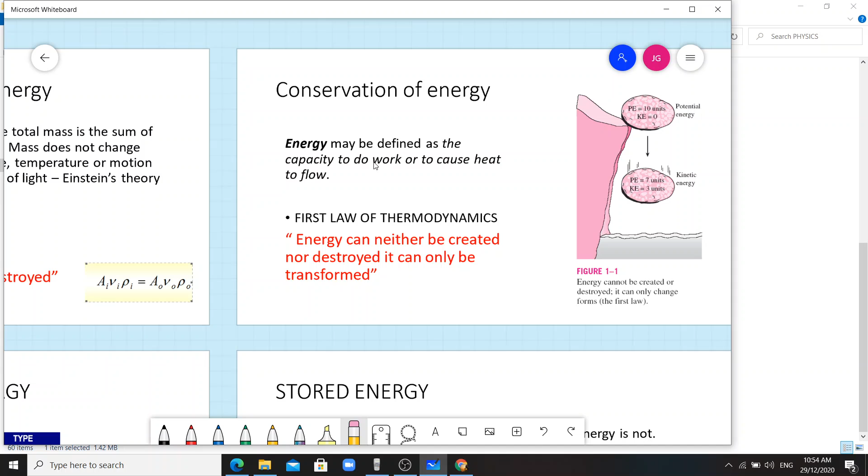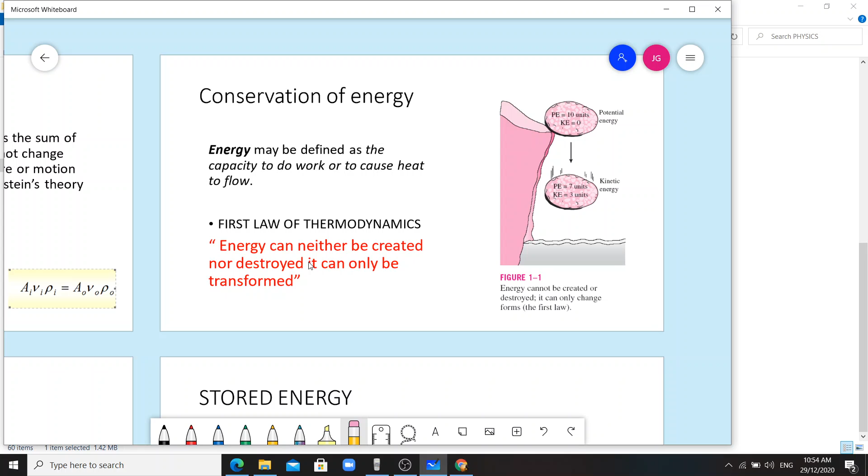Conservation of energy: energy may be defined as the capacity to do work or to cause heat to flow, as we discussed in the earlier video. First law of thermodynamics: energy can neither be created nor destroyed, it can only be transformed. There are different types and forms of energy.

Mechanical energy is a classification of energy. Its forms are potential, kinetic, and work. Potential and kinetic are stored energy, while work is a flow or transition type. Heat is a classification too, with forms sensible heat and latent heat, both flow or transition types. Chemical energy is molecular bond energy, stored. Internal energy is molecular motion, also stored. Electrical current is flow or transition. Nuclear energy is atomic bond energy, stored.

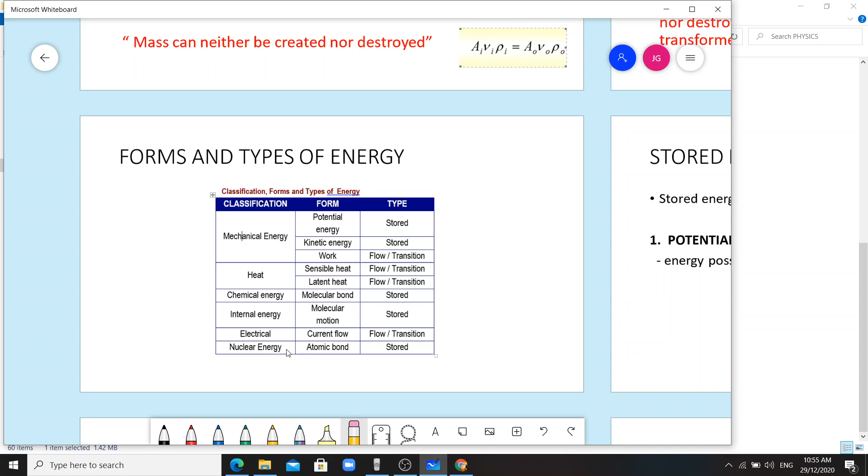When we say stored energy, it is a property, whereas transferred energy is not a property.

Potential energy is, so to speak, energy that's just there in the object—potential to do work. It's energy possessed by a mass due to the pull of gravity. Our formula before is potential energy equals mgh.

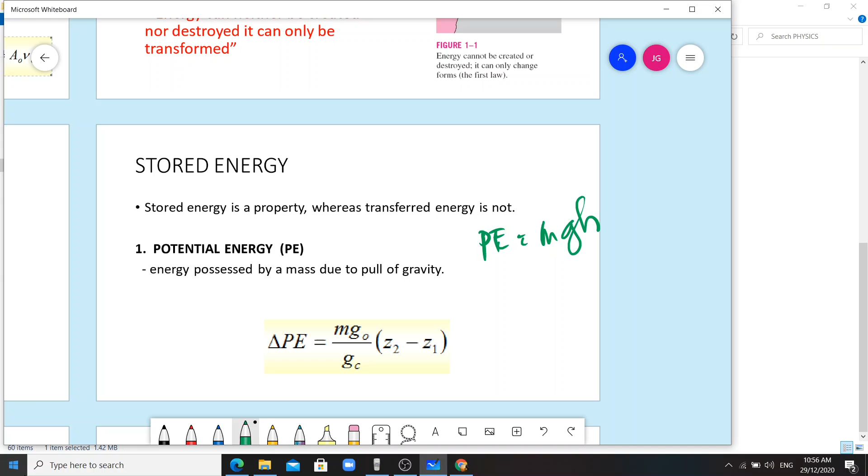Kinetic energy is due to motion or velocity. If potential energy is defined by height or vertical distance, kinetic energy is defined by velocity or motion. So this is 1/2 mv squared.

Internal energy: the sum of the internal kinetic energy and internal potential energy is called the internal energy—energy stored within a body or substance by virtue of the activity and configuration of its molecules. So per molecule and atom, there's vibration. For internal kinetic energy, we have translational kinetic, vibrational, and rotational energy. If these are the molecules, translational kinetic energy is when they move, say, left or right. Vibrational energy is when they move back and forth, vibrating. Rotational energy is when the molecules spin.

Internal potential energy is based on the distance between the two molecules—the height between them. For rotational kinetic energy, there are two types: rotation of the molecule itself, and rotation about the axis of the molecules. So internal energy is defined as U = mcv delta T. This is per molecule, the energy of its molecules.

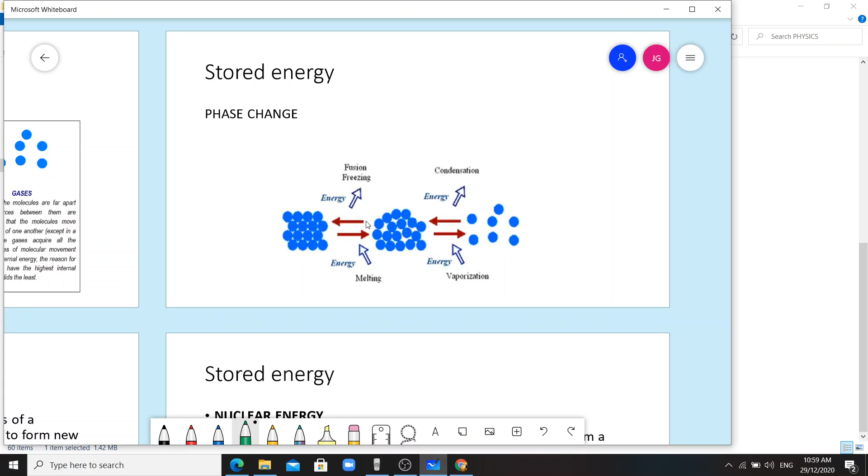Chemical energy is also a type of stored energy. A chemical reaction occurs when the molecules of a substance dissociate or combine with other molecules to form new substances—this is like our chemical equations and formulas in chemistry. There are two types of chemical energy: in exothermic reactions, energy is released; in endothermic reactions, energy is absorbed. For endothermic, energy goes in—like electrolysis. For exothermic, energy is released—like combustion.

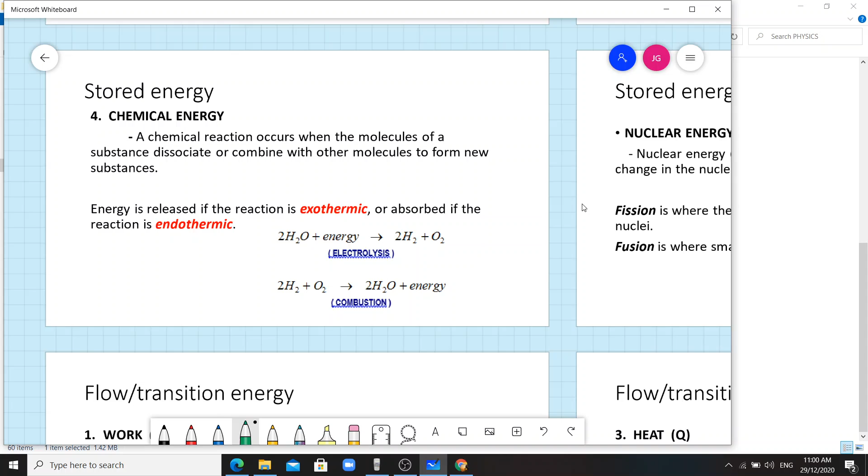Another type of stored energy is nuclear energy, sometimes called atomic energy, which results from a change in the nucleus of an atom caused by a nuclear reaction. There are two types of nuclear energy: fission and fusion. In fission, the nucleus breaks down into a number of smaller nuclei. In fusion, small nuclei combine to form a large nucleus. So fission breaks down, while fusion combines.

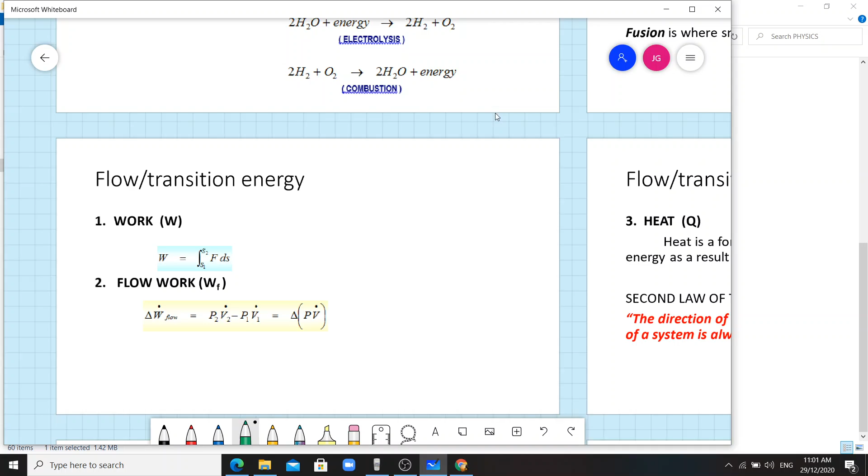So, tapos na tayo sa stored, punta tayo sa flow or transition energy. Ang stored energy ay property, ang transition energy is not. Nagfo-flow siya. Work is a transition energy.

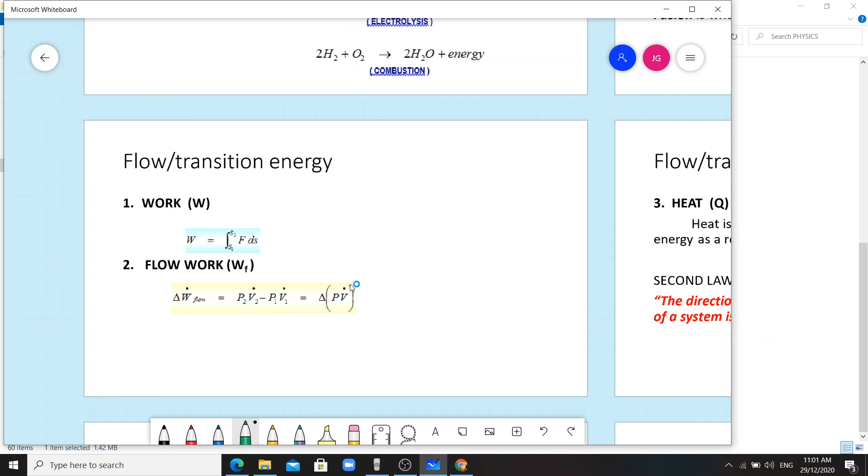Work is equals to force times distance, diba? Flow work naman can be equated as P2, pressure 2 times volumetric flow rate minus P1 V1. Paki-memorize lang yung formula.

Heat then is a form of energy that occurs only as a flow or transfer of energy as a result of temperature difference. Sabi sa second law of thermodynamics, the direction of heat flow in a substance or across a single boundary of a system is always from the higher to the lower.

So, from mainit to malamig. Ganon ang flow niya. Hindi pwedeng malamig to mainit, mainit to malamig. Kapag halimbawa meron kang kape, in-expose mo sa room temperature, lalamig siya. Hindi pwedeng uminit yung air na nakapalibot sa kanya. Ang mangyayari is, lalamig siya. Magre-release siya ng heat. Hindi pwedeng palamigin ng room temperature yung mainit.

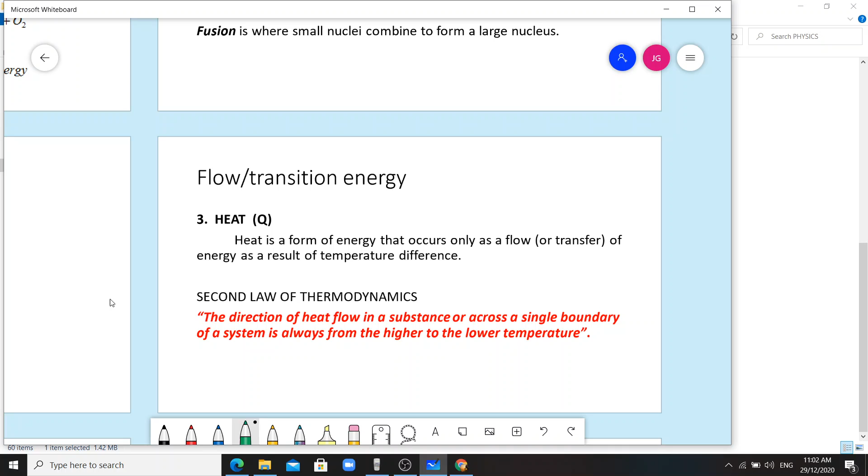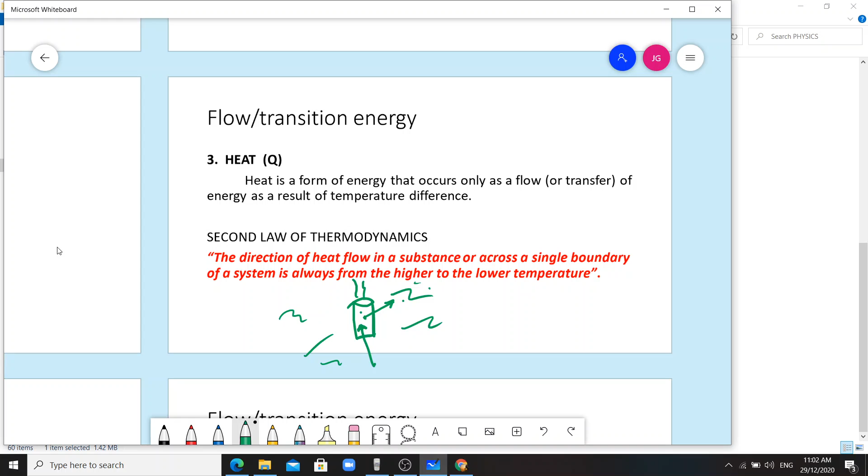Or painitin niya lalo yung kape. Halimbawa meron kang kape dito, mainit, tapos room temperature yan. Parating from mainit, lalabas yung energy, lalabas sa mas mababang temperature. Hindi pwede na from malamig, papainitin niya pa to lalo. No, it's not going to be like that. Baliktad siya.

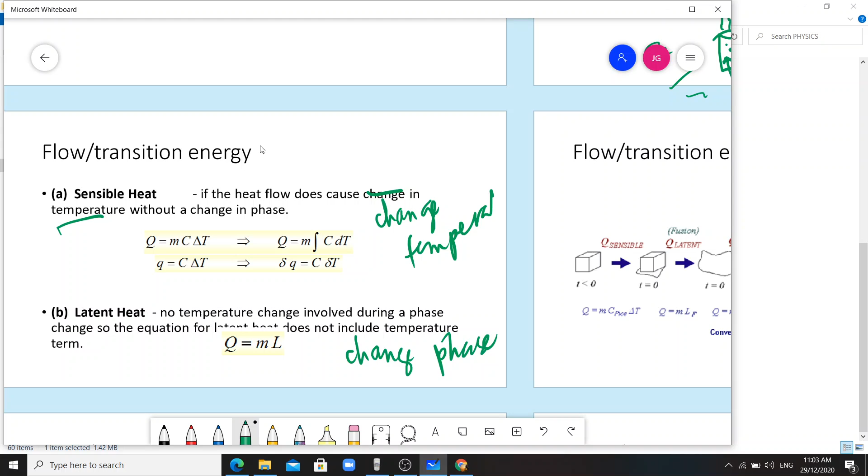Meron tayong two types of heat, diba? Sensible heat, pag sinabi natin sensible heat, merong change in temperature. Pag latent heat, walang change ng temperature, pero meron ng change phase. Sensible heat, merong change in temp, pero walang change phase. Dito naman sa latent, may change phase pero walang change of temp.

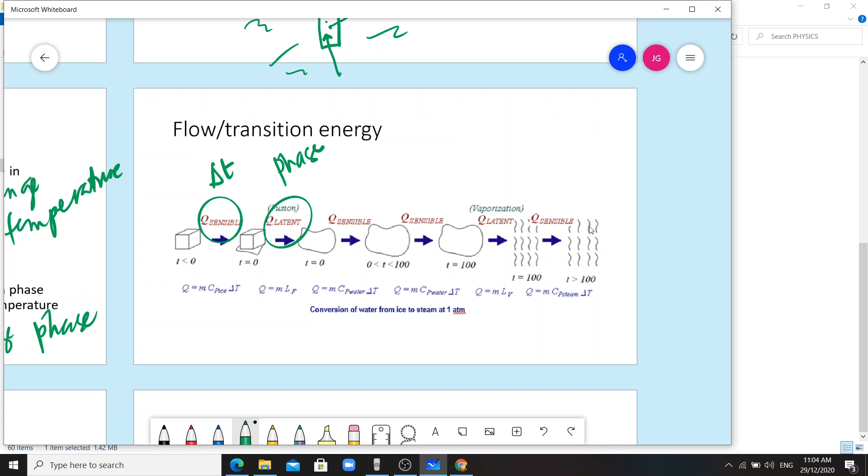Sensible, nag-change lang ng temperature pero hindi nag-change phase. Latent heat, parehas ng temperature pero nag-vaporize, so naging gas. And then sensible ulit. Basta tandaan, kapag sensible, change ng temperature. Pag latent, phase ang nag-change, from liquid to gas, gas to liquid, solid to liquid, ganyan.

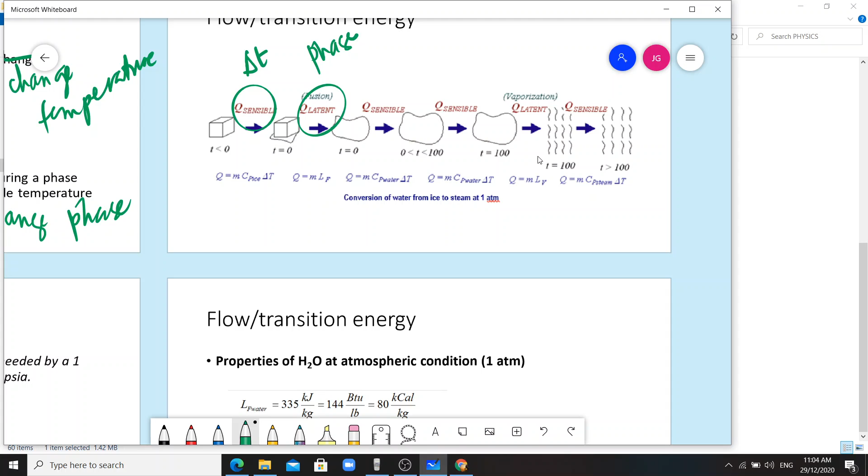So ito rin yung formula niya. May change temperature kapag Q naman latent, so M times latent heat of fusion. Pag vaporization naman is latent heat of vaporization.

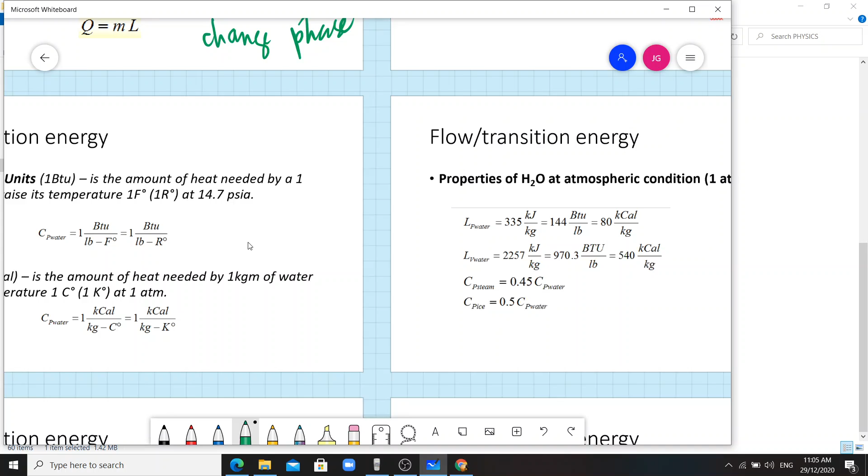Meron tayong British thermal unit. 1 BTU is equivalent to the amount of heat needed by a 1 pound mass of water to raise its temperature at 14.7 psia. Kilocalorie naman is the amount of heat needed by 1 kilogram of water to raise its temperature by 1 degree Celsius. Meron tayong constant na LF or latent heat of fusion.

335 kJ per kilogram, 144 BTU per pound, 80 kilocalories per kilogram. Pag vaporization naman, ito yung nag-vaporize: 2257 kJ per kilogram, ito ay water ha, 970.3 BTU per pound, 540 kilocal per kilogram.

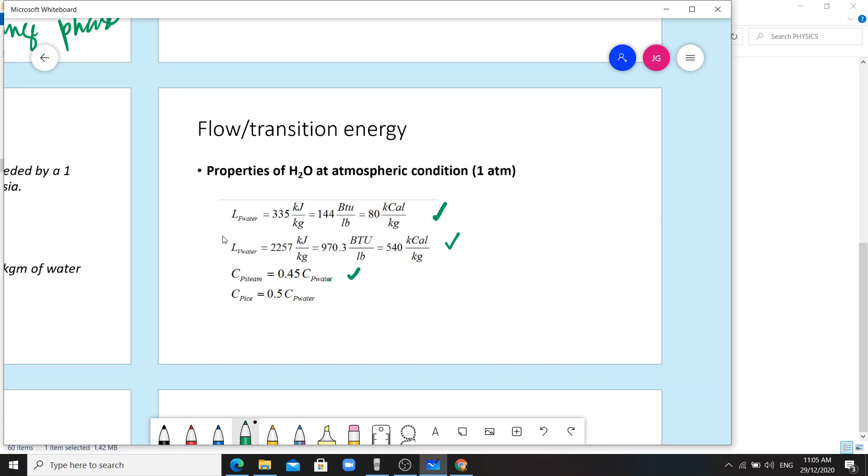CP ng steam, 0.45 ng CP ng water. CP ng ice is 0.5 CP ng water. Ang CP ng water ay 1 BTU per pound R.

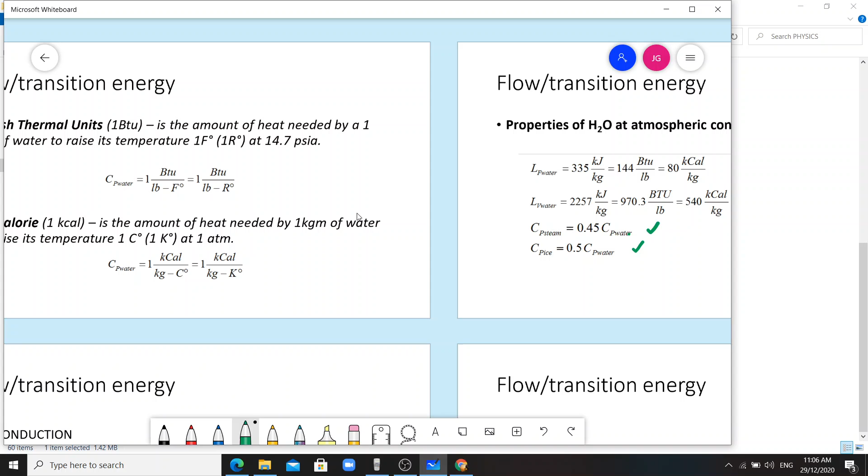Okay, let's proceed. Flow transition energy, meron tayong sa heat ulit: conduction, convection, at radiation. Pag sinabi natin conduction, ito yung merong contact. May contact, halimbawa, meron ka ditong two bodies, A to B. Nag-flow yung init, so conduction yan.

Kapag convection naman, ito yung object mo and then nakapalibot siya ng fluid. So, from solid to fluid, convection yan. Kapag radiation naman is from the solar energy, radiation ng araw.

Ang Q is equals to negative KA dt over dx. Convection is Q is equals to HA and then temperature of solid surface minus temperature of fluid. Pag radiation naman, surface emissivity times the Stefan-Boltzmann, times the area and then the temperature 1 and temperature 2.

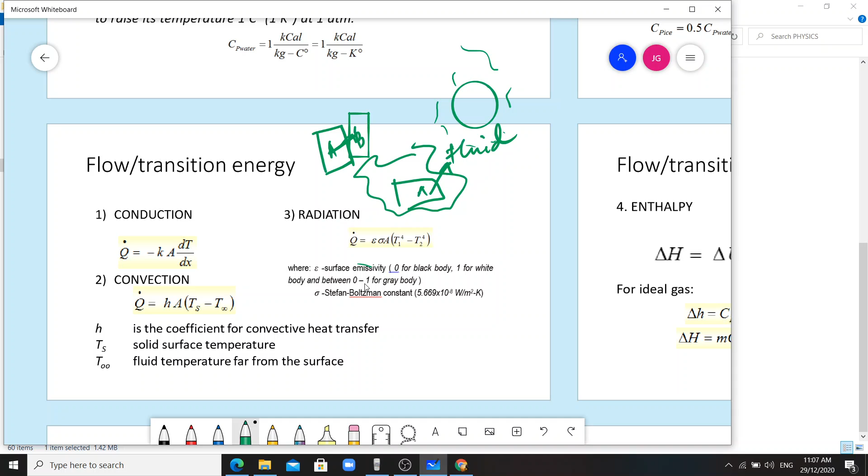Paki-memorize lang po yung formula kasi you need it. Flow transition energy, meron tayong tinatawag na enthalpy. Delta H equals to internal energy plus the work. Pag gas naman is MCP delta T.

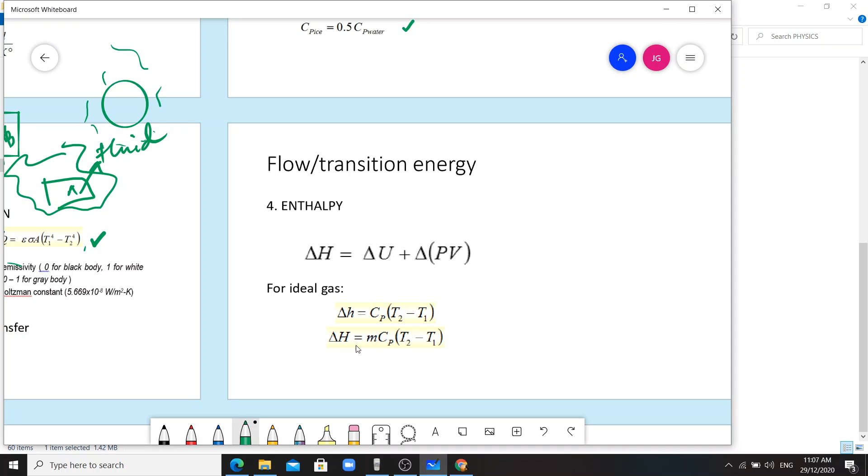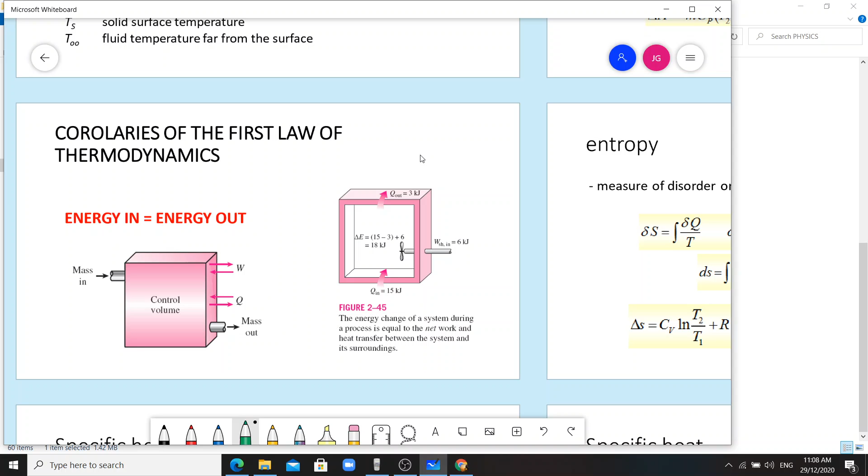Sabi sa corollaries of the first law of thermodynamics, energy in is equals to energy out. Mass in is equals to mass out. Kung ano yung pumasok, yun din po yung lalabas. Entropy, measure of disorder or chaos. Ito yung movement, yung galaw ng molecules.

Ito yung entropy. Ang formula niya is CV ln T2 over T1 plus R ln V2 over V1, or CP ln T2 over T1 minus R ln P2 over P1.

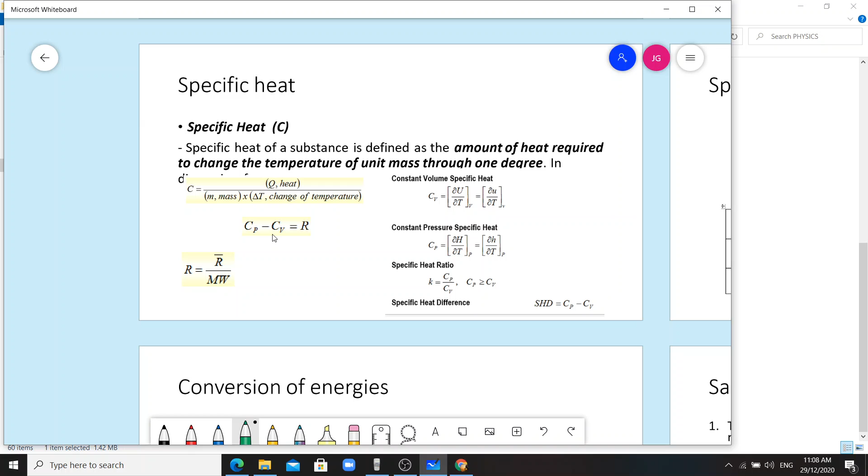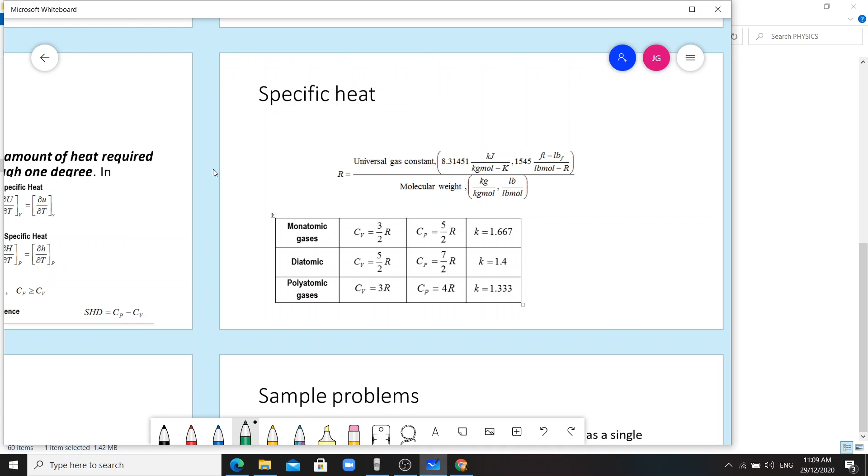Paki-memorize lang din yung formula. Specific heat, ayan ang specific heat. Equivalent sa, meron tayong Cp minus Cv is equals to R. Ang R is gas constant, okay. So, universal constant, specific heat. Paki-memorize lang din po. And then, conversion of energies. Paki-memorize yung conversion table.

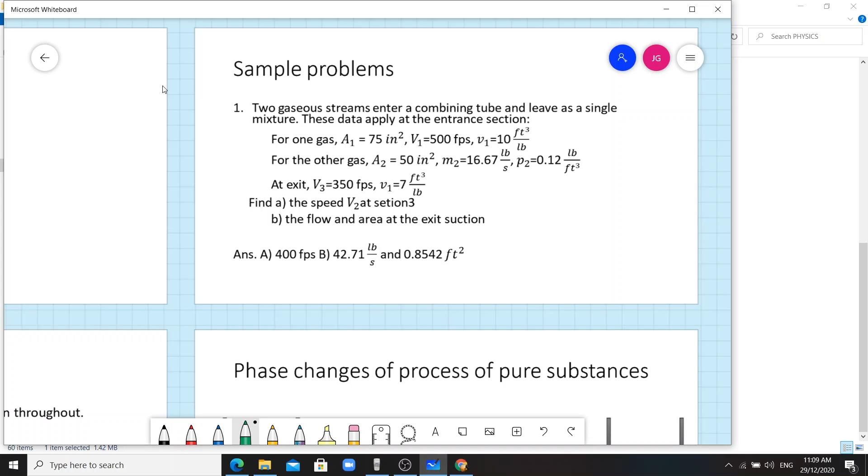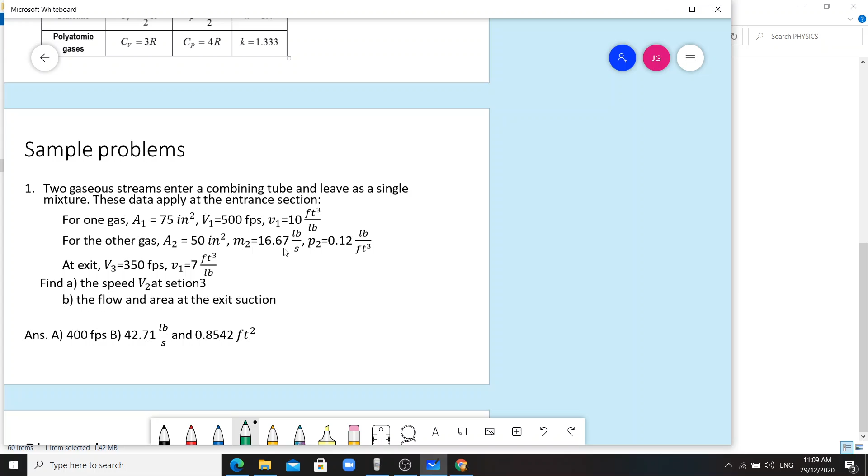Okay, sample problem. Two gaseous streams enter a combining tube and leave as a single mixture. This data apply at the entrance section. Okay, sa entrance, ito daw yung state niya. Ang area niya is 75 inches squared. Velocity niya is 500 feet per second. Ang specific volume is 10 feet cube per pound. Ang paglabas is 50 inches squared, 16.67 pound per second, and then density na 0.12. At exit, sabi niya combining tube, so ang itsura niya is ganyan. Area 1, area 2, and then area 3.

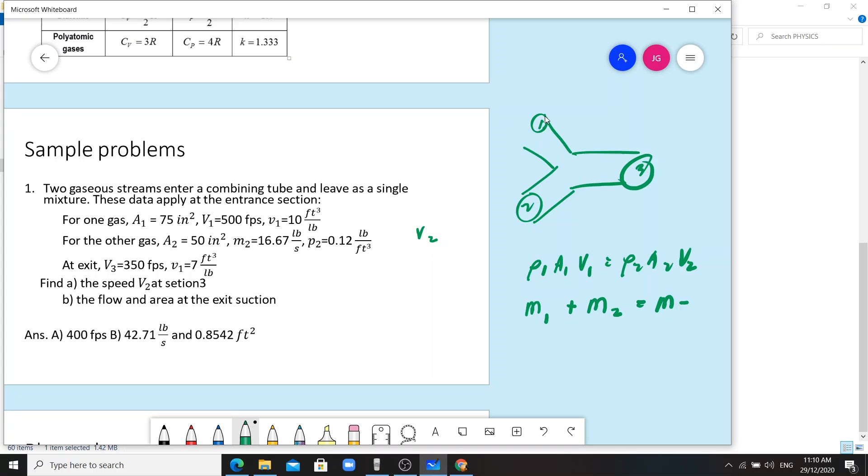Sabi, find the speed V2 at section 2. Ito, section 2, find the speed. Okay, ano daw yung V2? Di ba meron tayong formula na rho 1 A1 V1 is equals to rho 2 A2 V2, di ba? So meron din tayong mass 1 plus mass 2 is equals to mass 3. Okay, so hinahanap is speed at V2.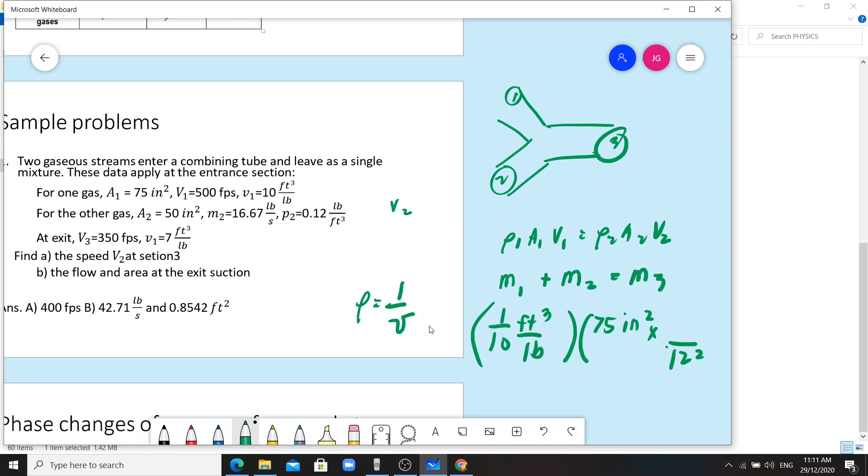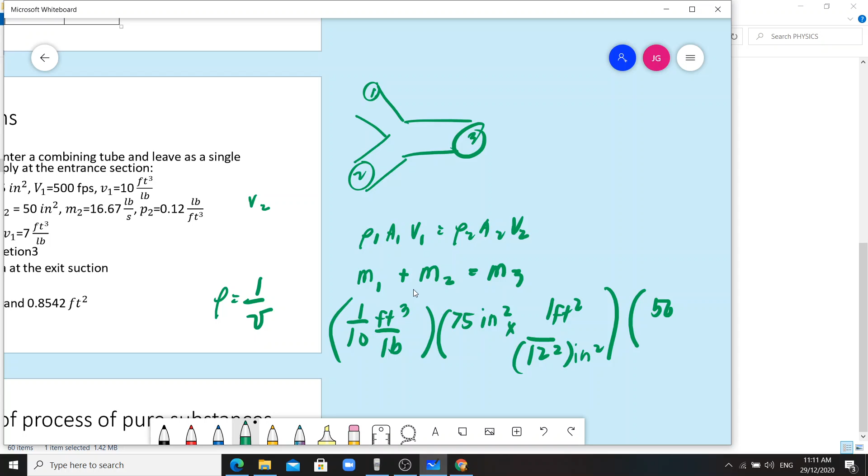Ito, okay, so gawa tayo ng equation. Meron tayong density, ang density ay reciprocal ng specific volume. So 1 over v, 1 over 10 feet cube per pound. And then area na 75 inches squared, 75 inches squared times 12 squared, 1 feet squared, 12 squared inches squared. And then velocity na 500 feet per second. Okay, plus

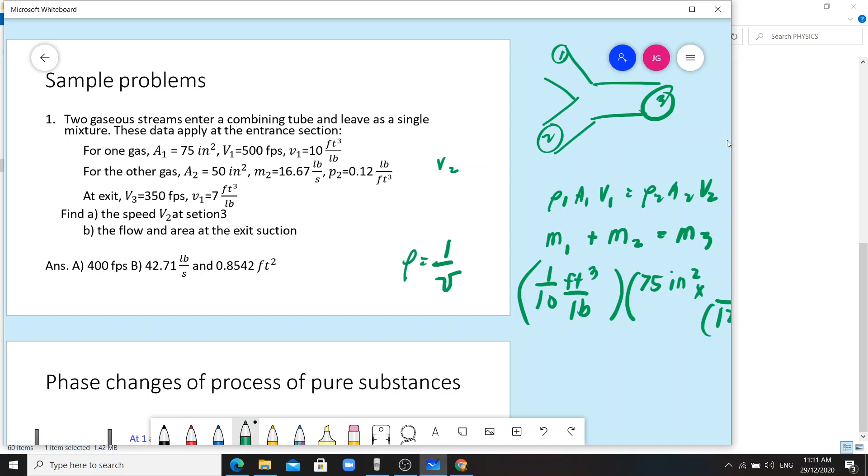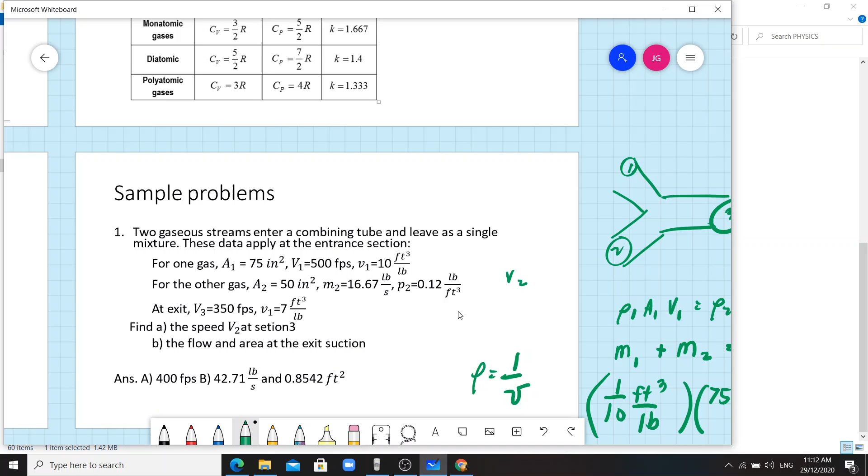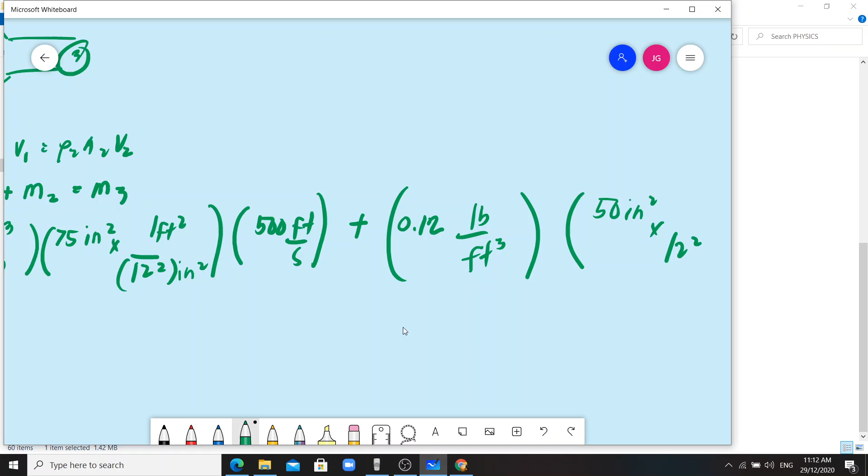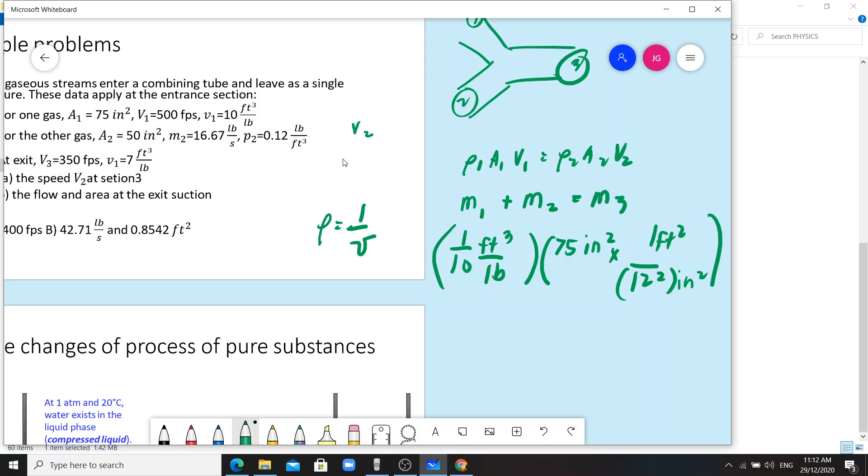Area 2, rho, wala tayo, ay meron tayong rho 0.12, ano yan, 0.12 pound per feet cube. Times A na 50 inches, 50 inches squared times 12 squared inches squared times 1 feet squared. And then meron tayong mass na 16.67 pound per second. Meron tayong mass na 16.67.

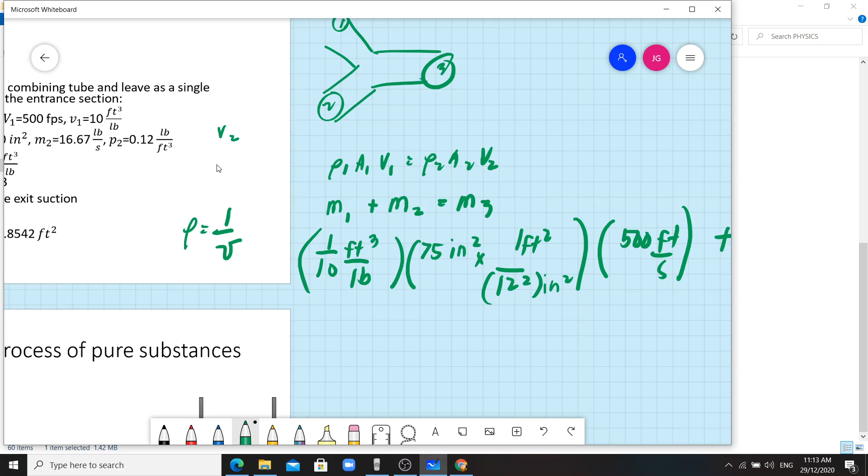Okay, ang kailangan natin dito kasi is yung sa state 2 is yung, so meron siyang mass na to. Kailangan natin is yung velocity, di ba? Wait lang ah, mass, 'di ba ang mass ay equivalent sa rho AV, 'di ba? So sa state 2 pala is may given na siya na mass, 16.67. That is pound per second.

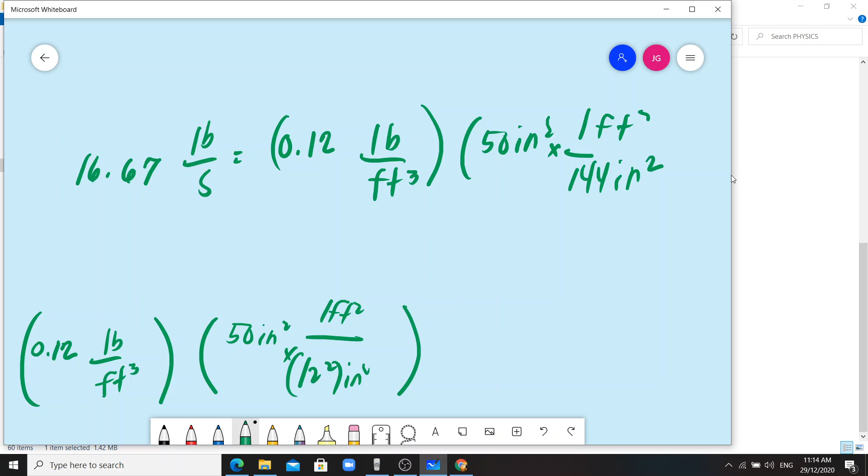Tapos times 0.12 rho pound per feet cube, A 50 inches squared over 144 inches squared, and then 1 feet squared, and then velocity makukuha na natin. So velocity ay equivalent sa 16.67 over 0.12, times 50 over 144. So ayan, ang velocity natin is equivalent sa 400 feet per second. Okay, 400 feet per second. Check natin kung tama.

Okay, okay na tayo dito. The flow and area at the exit section, the flow and area at the exit section. So ito palitan na lang natin to ng 400, 400 feet per second is equals to rho

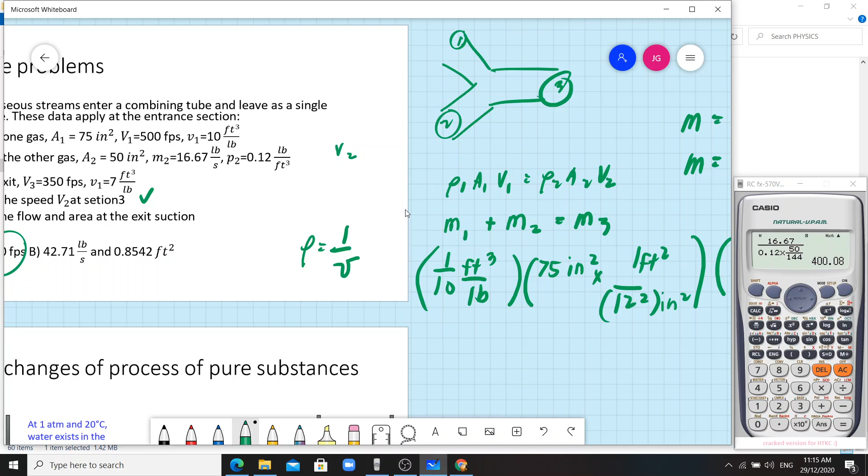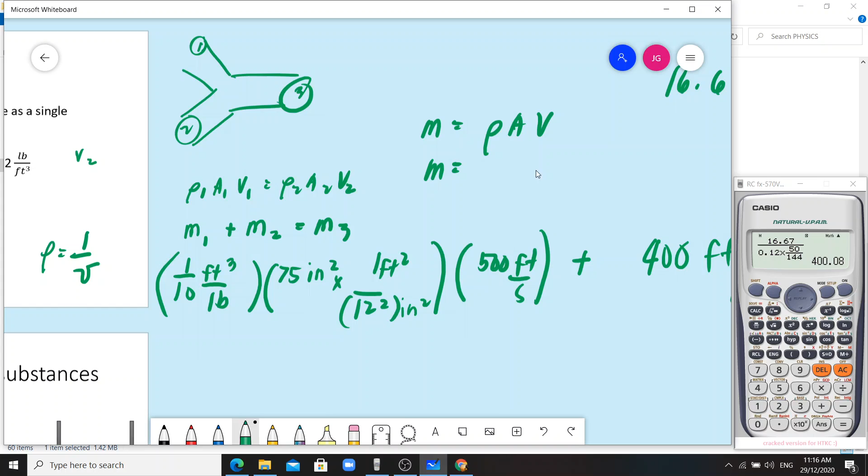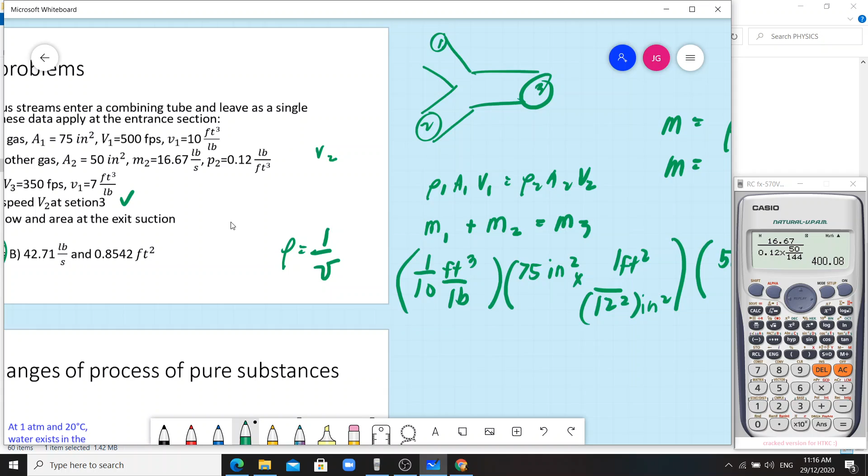Okay, wala tayong rho, that is 1 over 7, meron tayong specific volume, feet cube per pound, rho, and then area na wala tayong area, meron lang tayo velocity. Hinahanap yung area 3, at velocity na, ano yung velocity natin? 350 feet per second. Okay, mali yung ano natin dito na 400. Dapat ito ang ano natin ay yung 16.67 pound per second. Kasi ang rho AV ay mass.

Okay, so ito is compute natin 1 over 10 times 75 over 144 times 500 equivalent sa 26.04166667 plus 16.67 is equals to 350 over 7, 50 A3.

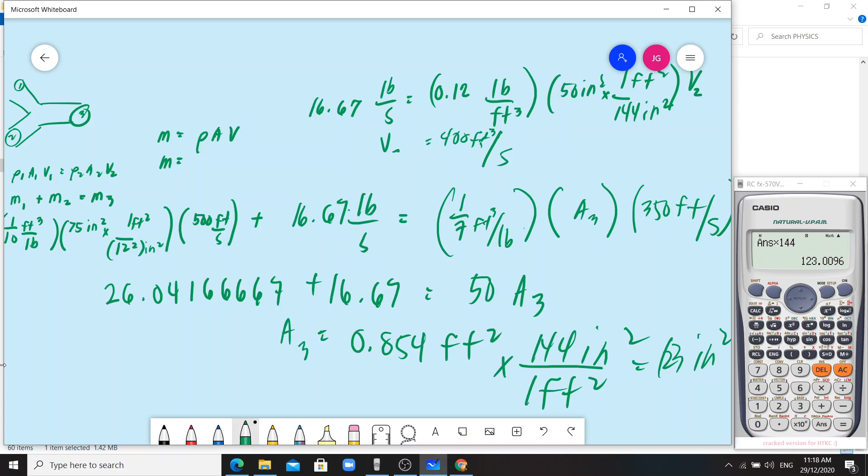Okay, so ito ay equivalent sa 26.04166667 plus 16.67 over 50, 0.85. A3 is equals to 0.854 feet squared. Convert natin ng inches squared times 144 inches squared, okay, so that is equivalent to 123 inches squared. Okay, so tama pa, okay na rin to palang feet squared, 0.85. Ayan, wala yung calcul natin.

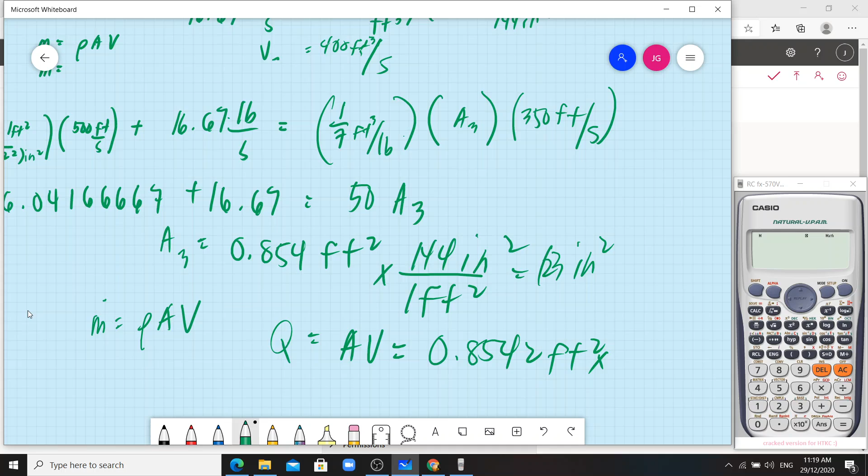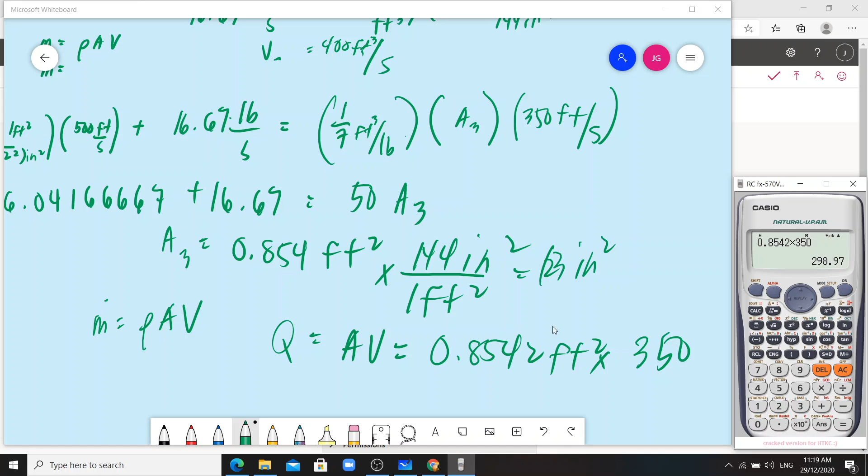Okay, so flow, paano ba natin kukunin yung flow? Q, mass is equals to rho A V, diba? So para makuha natin yung volume flow rate, Q is equals to AV lang. Okay, so ang area natin is 123 inches squared, sorry, area natin is 0.8542 feet squared times velocity niya, na ang velocity nito ay 350. 0.8542 times 350, okay, that is equivalent sa 298.97.

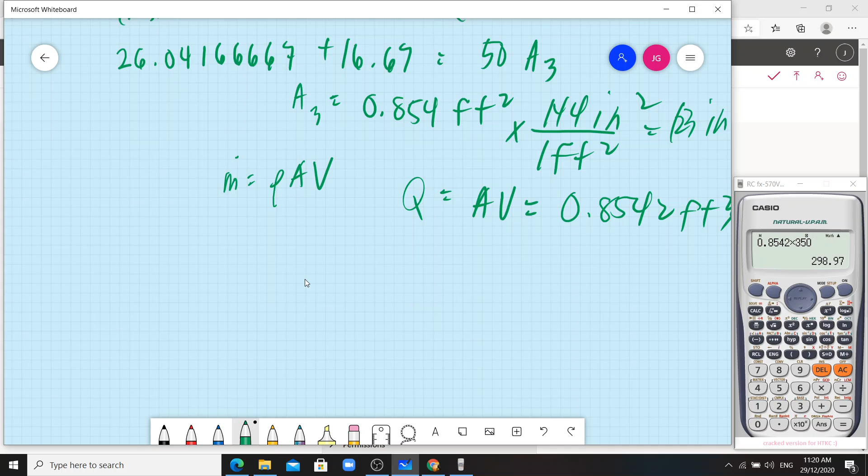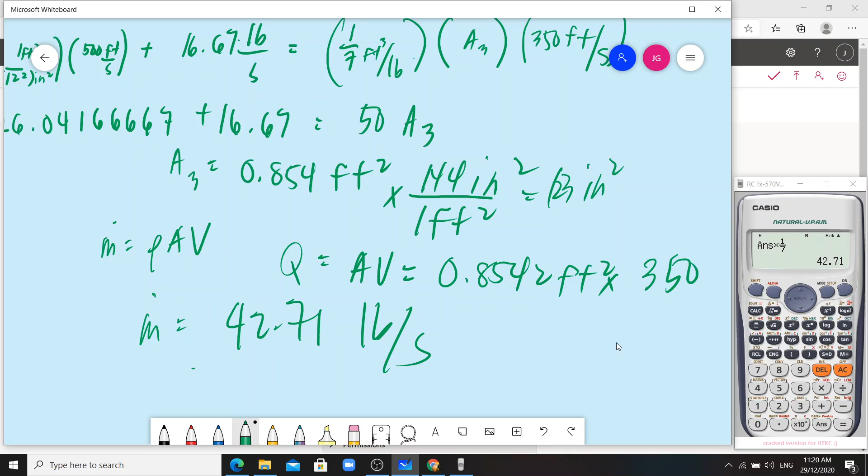Okay, area and flow and area. Yung flow naman, i-times lang natin to ng density niya. Ang density niya is 1 over 7, 42.71. Okay, so mass flow rate is 42.71 pound per second. Okay, so this is our answer for sample number 1.

Okay, so let's proceed to pure substances. A substance that has a fixed chemical composition throughout, o yung tinatawag nila na pure, walang halo. Okay, yun yung tinatawag na pure substance.

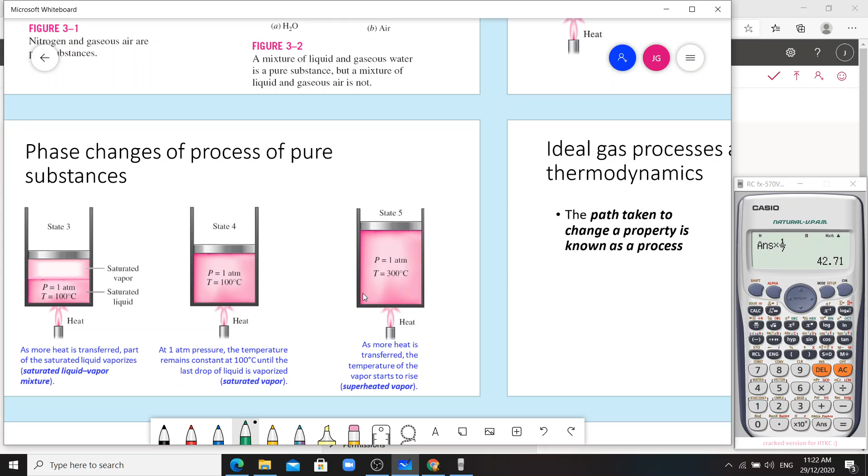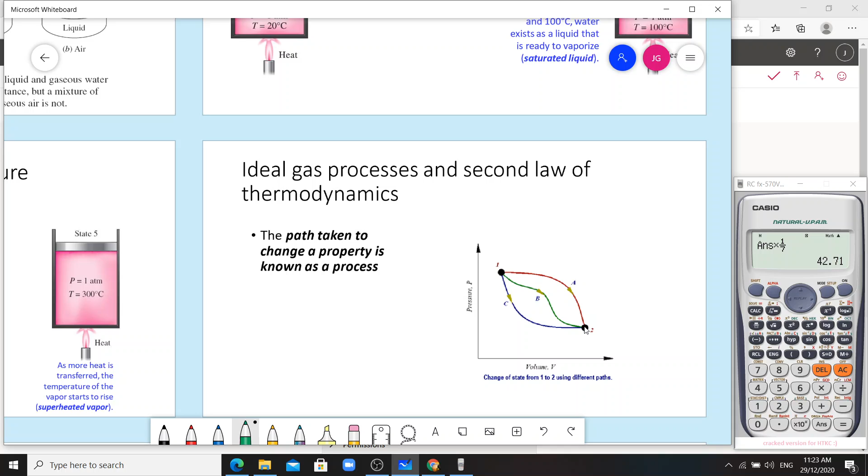Yun yung superheated vapor. So, meron tayong tinatawag na ideal gas processes and second law of thermodynamics. Pag sinabi natin process, the path taken to change a property is known as a process. So, from initial state 1, mag-undergo siya ng process A, magiging 2, or process B, magiging 2, or process C, magiging 2. The path taken to change a property is known as a process. So, from property 1, magiging property 2 siya.

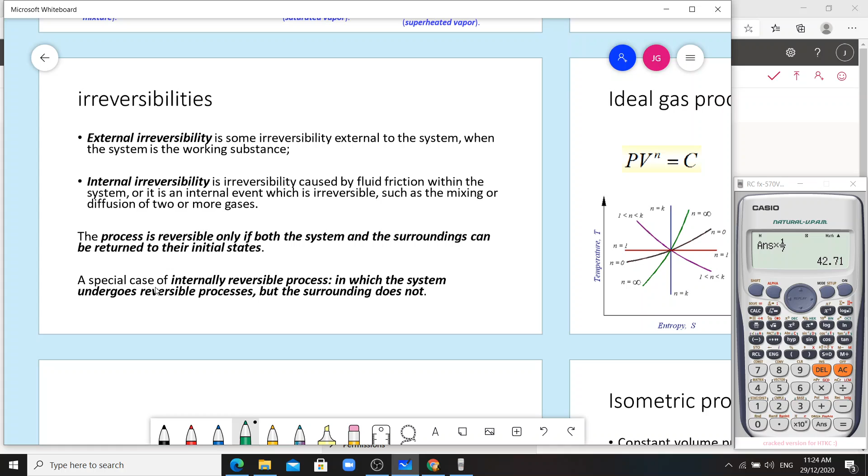The process is reversible only if both the system and surroundings can be returned to their initial state. So, irreversible, hindi na maibabalik sa dati. A special case of internally reversible process in which the system undergoes reversible process but the surroundings does not. Internal lang, yung system ang nagre-reverse. Okay, meron tayong ideal gas processes. Ayan, madami.

Meron tayong isometric pag constant ang volume, isobaric pag constant ang pressure, isothermal pag constant ang temperature, isentropic pag constant ang entropy, polytropic kapag ang n natin is greater than 1 but less than k. So, isometric process, tandaan, constant volume. Sa PV, from state 1 to state 2, hindi siya nagbago ng volume.

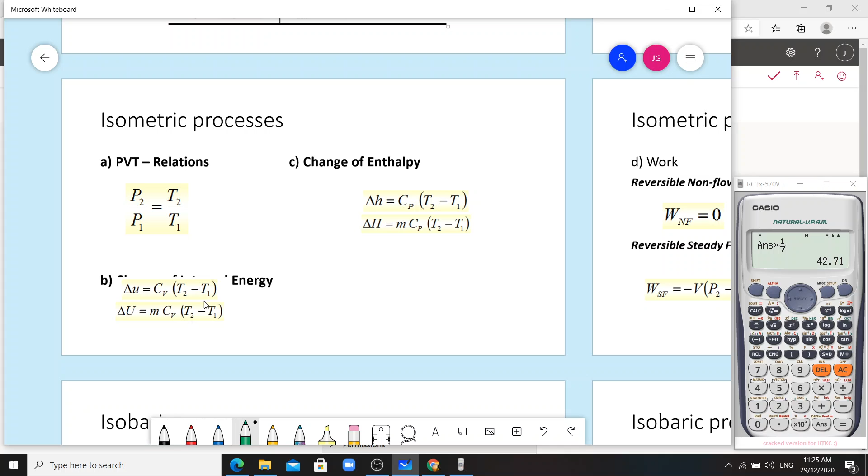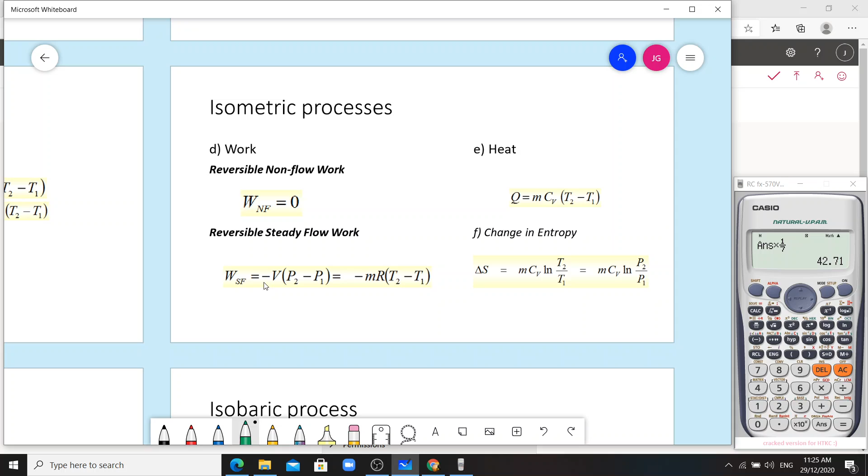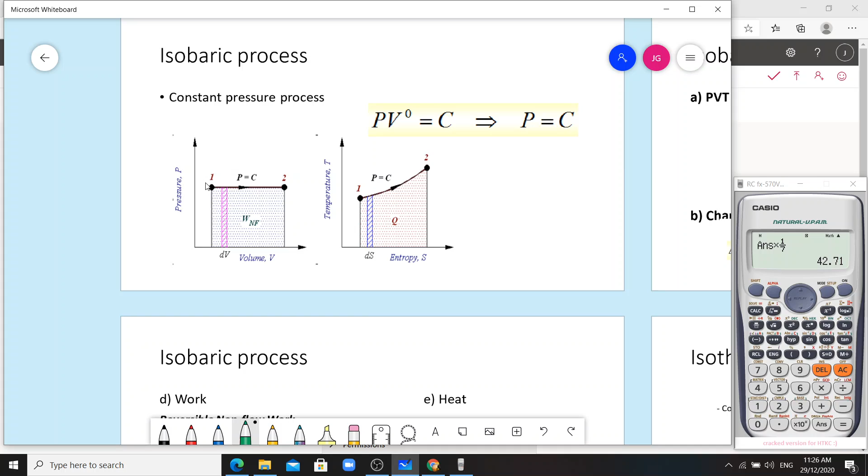Pag isometric process, ang work niya is wala, kasi hindi nagbago yung volume. Heat, mcv delta T. Change in entropy is mcv ln T2 over T1. So, guys, you just have to memorize all of these formulas. Pag isobaric, constant yung pressure sa PV diagram 1 to 2. Nag-expand yung volume, tataas ang temperature, tataas din ang entropy. You have to memorize these formulas.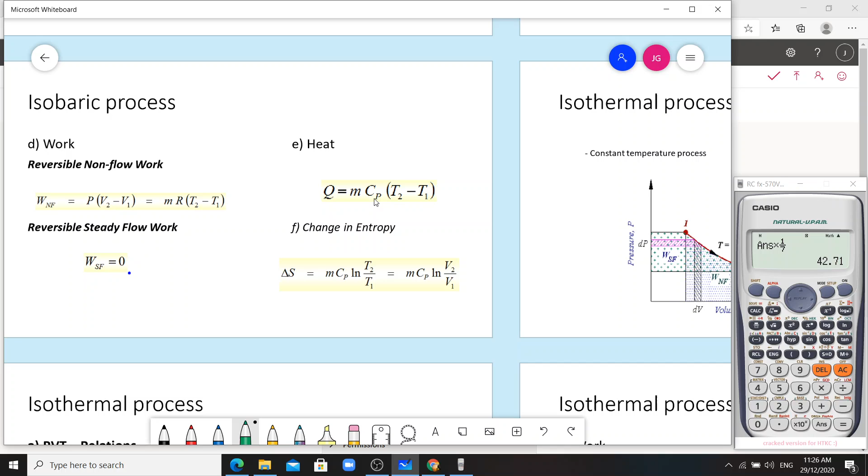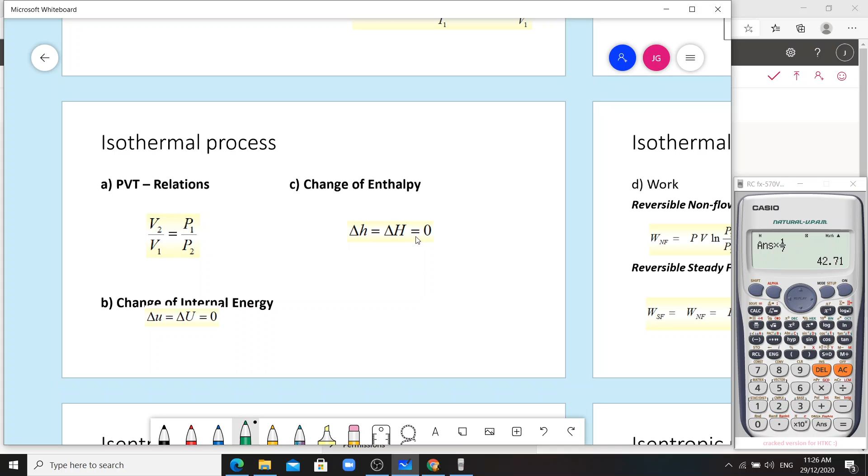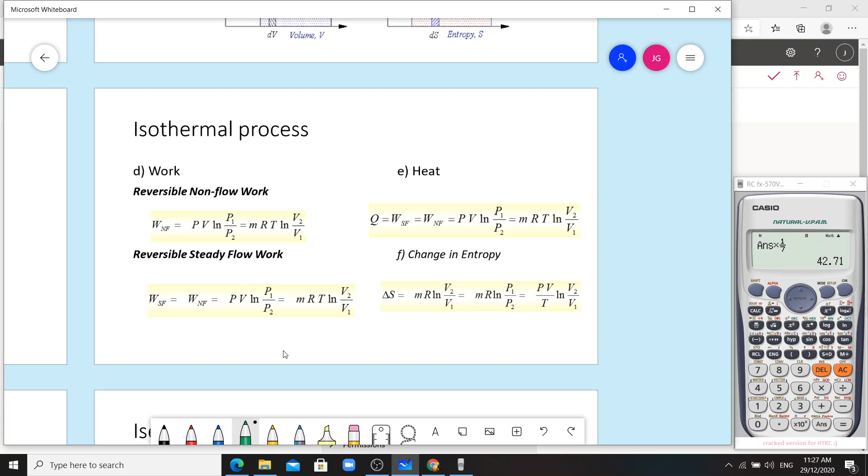You have to memorize this one. Wala siyang internal energy at enthalpy kasi constant ang temperature. Ang flow niya, ito ang formula. Steady flow, ito rin. Heat, and then change in entropy. You just have to memorize all of these formulas. Pag isentropic naman, constant entropy. Memorize these formulas. And then, this one.

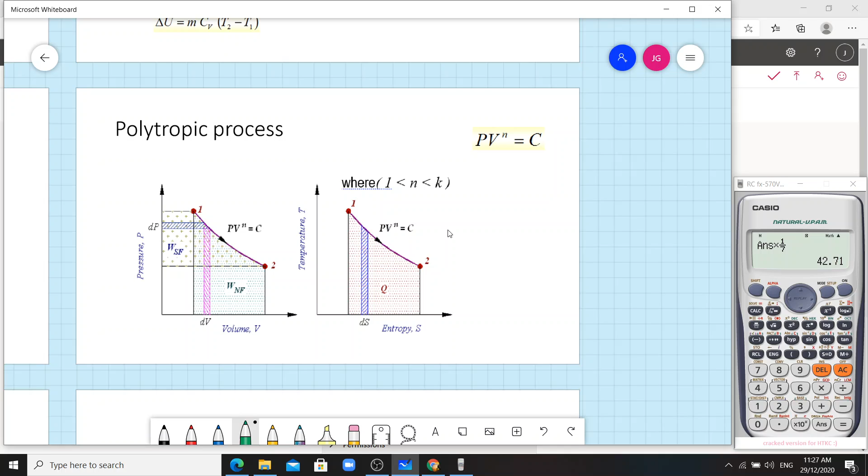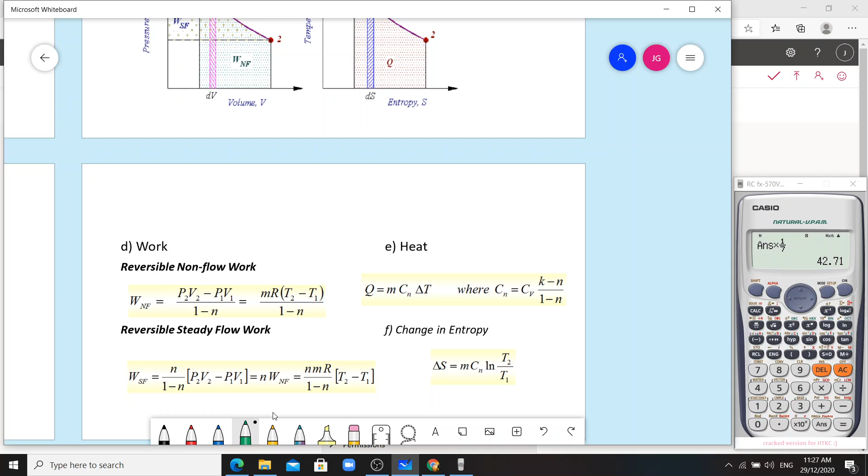Memorize all the formulas. Polytropic process, ayan din. You have to memorize this one, and this one. Kailangan nyo pong i-memorize all of these formulas. Pakitandaan yung formulas. And that ends our lecture for part 2.